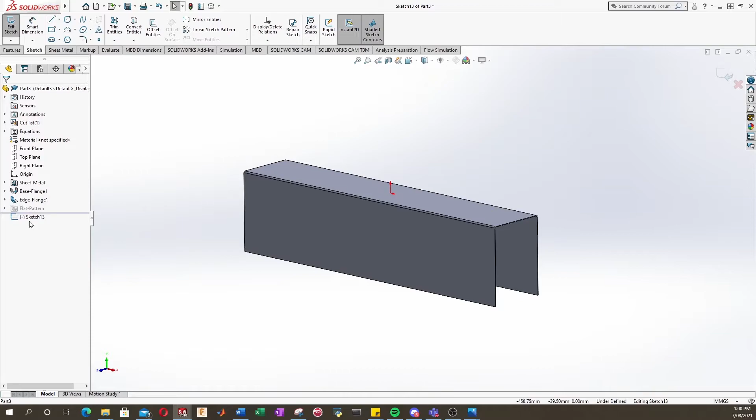So what we'll do is begin by creating a new sketch, and either we can sketch on the face here, or we can just select the front plane, which is in the middle. So let's just do the front plane, and then we'll right click our sketch, normal to, so that we're in our 2D orientation to make sketching easier.

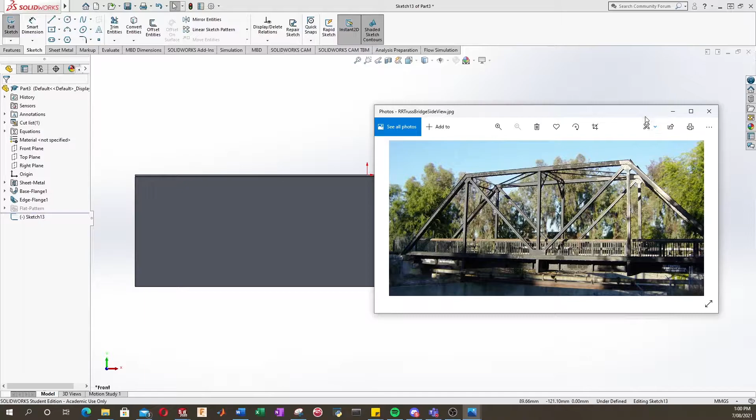And I think the design I'd like to go with today will be this bridge. So you and your group will decide on a sketch to choose to design your bridge from. So this is what I've picked for today. Very basic looking truss. So let's start by putting in some construction lines, because our bridge is going to be symmetrical, so we can mirror it later when we have finished. Just try to make this horizontal.

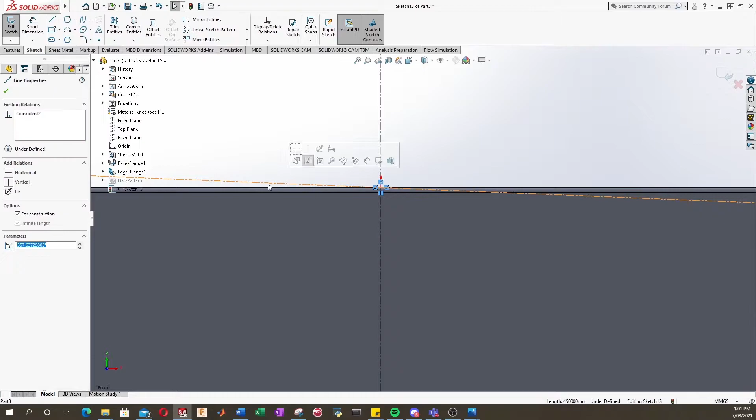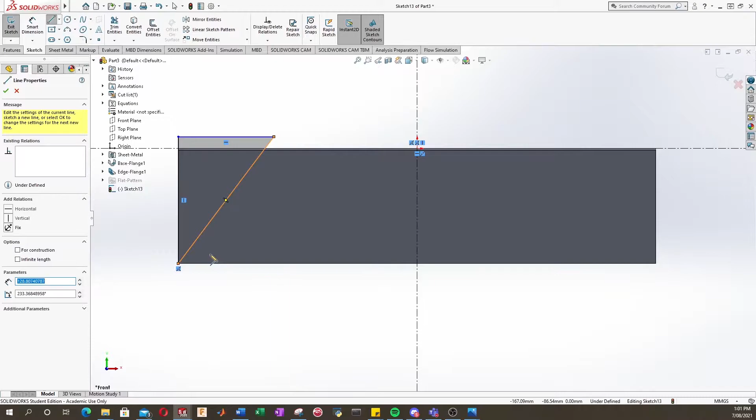Okay, so we can start modeling in our truss elements. So I'm just going to grab some lines and start drawing here. Actually, before I do that, let's put in some other construction lines which are going to help us, and we'll say that these are 10 millimeters. Okay, and now we'll draw some more of our truss. I think it'll make more sense as we go along.

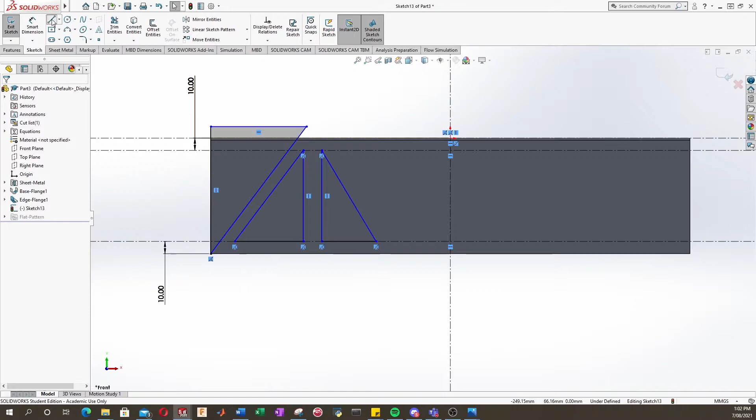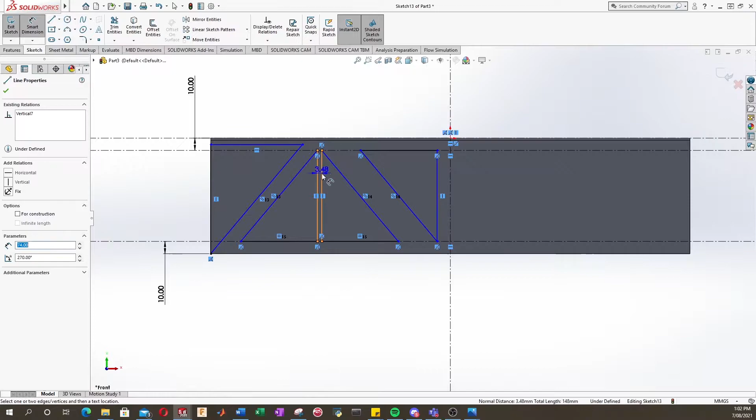Cool. So now we can add in some definitions. So let's make these parallel. Make these two parallel. Let's make these two equal. And just move some of this out of the way. Let's dimension this gap here as 10. 10. And since we're going to mirror from this line, let's make this 5.

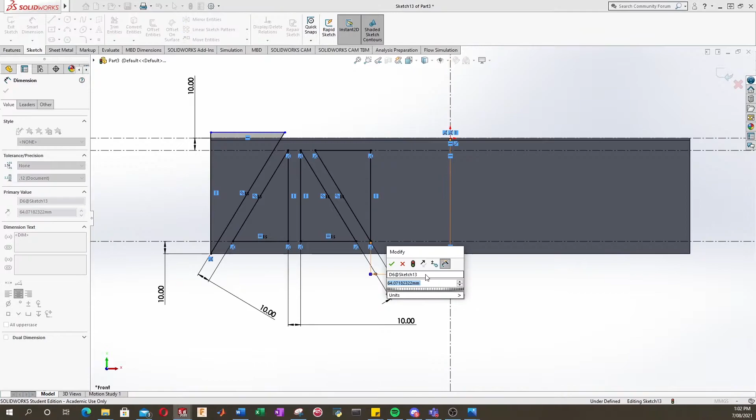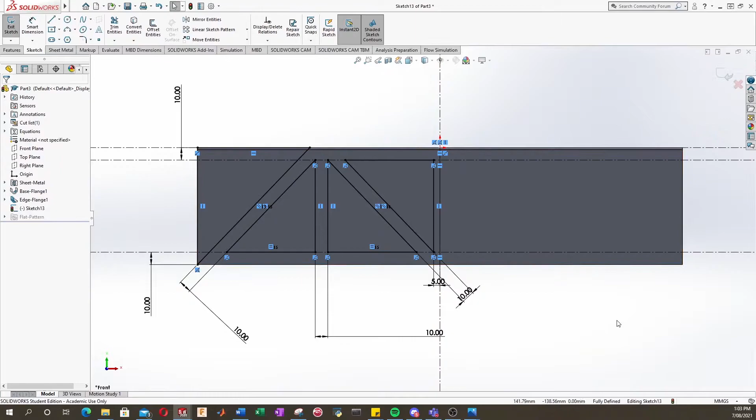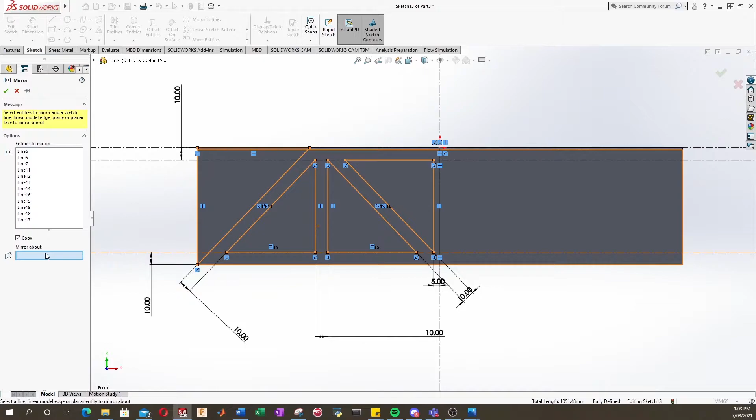And we kind of want to chop off the top of our bridge here, so let's set these two lines collinear. Cool, so now our sketch here is fully defined. So now we'll mirror the truss onto the other side. So let's select mirror entities, and we'll just choose all of our lines. Mirror about here. Okay.

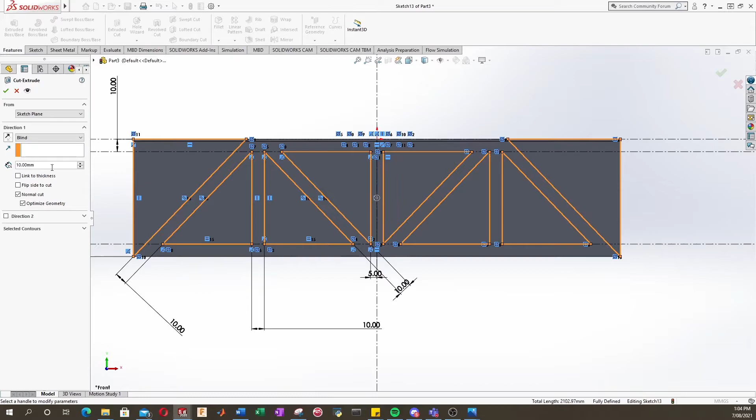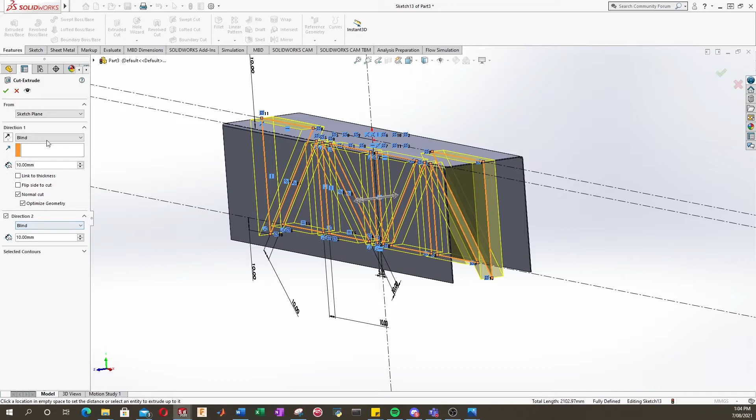And now we can go into our features section, and we'll click extruded cut. And so now we need to select the shapes that we want to cut. So this one, this one, this one. And since we've drawn on the middle, we need to make sure that we cut through the sides of our truss bridge. So let's tick direction 2. So now we're extruding both ways, and we're going to go through all and through all, and then click the green tick.

And so now we have a basic truss, which is really cool. So next we'll remove some material on the top here. So let's sketch here, line up our view, and put in our construction lines. And we'll just cut out some shapes.

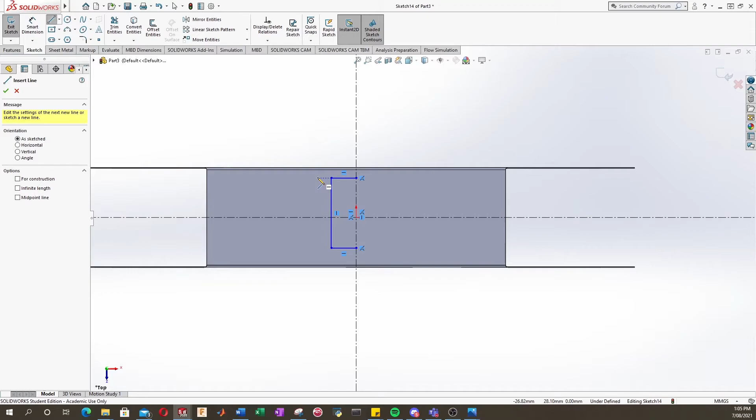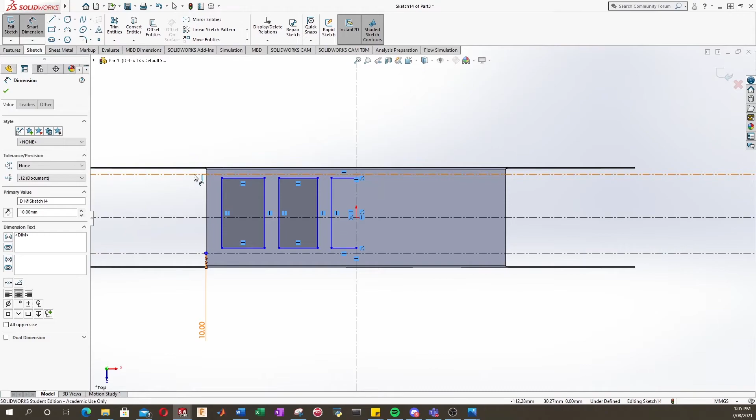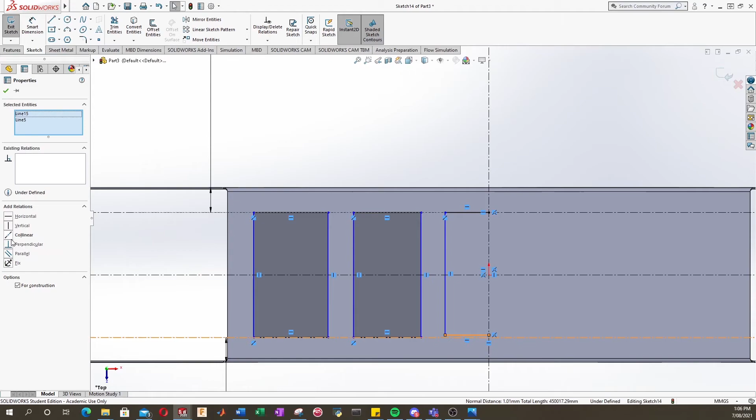So remember, this truss here, we're going to build underneath our road. But if you were going to build above your road, we have to keep in mind that those exclusion zones are there. So I'm just going to show you a way that we can do that. Make sure we've got clearance. Just define these. And our thickness.

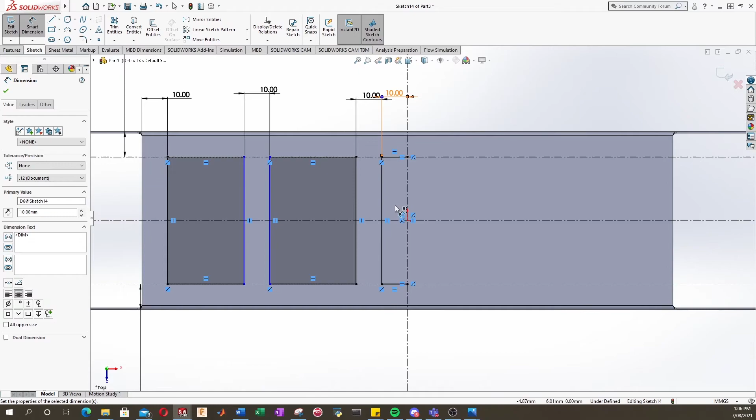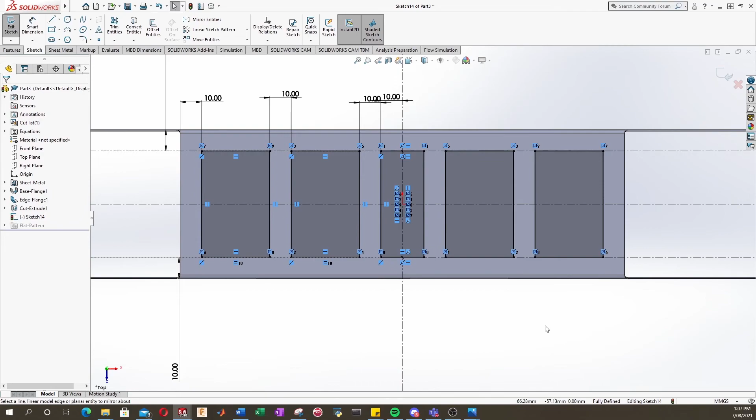And we know that our hole size that we need is 20 millimeters, so we can define this as 10, and then when we do the mirror, it will be 20 mil. So this can still move, so let's make these two lengths equal. And once again, we'll select the things we want to mirror and the axis we want to mirror about. Cool. And back in features, extrude cut through all.

So now we've removed a lot of weight from our truss, and we've put in our members, and we have clearance for the pin. However, with this design, we won't actually need this clearance because we're building under the road, but I just wanted to show you guys how that worked. Cool. So in the next video, we're going to look at adding in some extra bracing to our truss bridge and removing some of the points that may be highly stressed, such as these sharp corners.